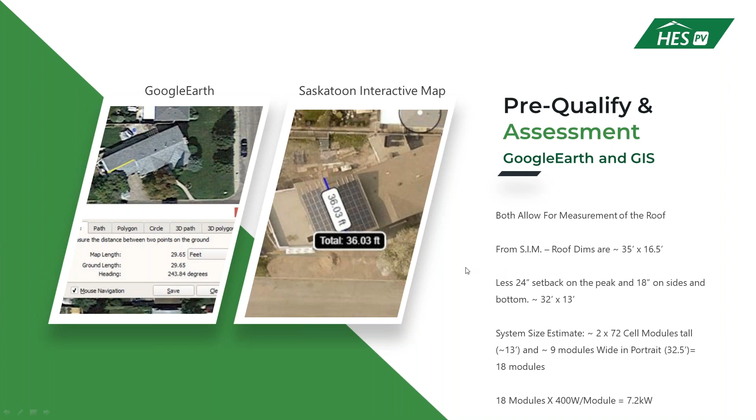Sometimes you want to present more. You want to get a better idea of what you could get, what you can provide your customer in terms of not only the system size, but as well the production. And there's a lot of great tools out there. A lot of them are pay to play, so you're going to be purchasing the software.

At the moment, we're currently using Aurora for some of our modeling, and I know a bunch of dealers out there are also using it. But there is PV Complete, Helioscope, and PV Assist, as well as many other ones. We're not selling any of their packages, just giving you ideas of what's around for you.

They all kind of act in a similar manner in that, by modeling the roof and adjusting the setbacks, you can populate based on your solar module size. They then take, of course, the local irradiance for that area, give a production estimate based off that irradiance, and give you a good model of what the roof can look like in terms of solar panels.

And a really nice perk of that is the ability to generate customized reports, something that your name can be on, delivered to site with that initial site visit. Cons, of course, it's pay to play. You've got to put the money up for it. Sometimes it's a monthly subscription, some are annual, and some are just outright purchase.

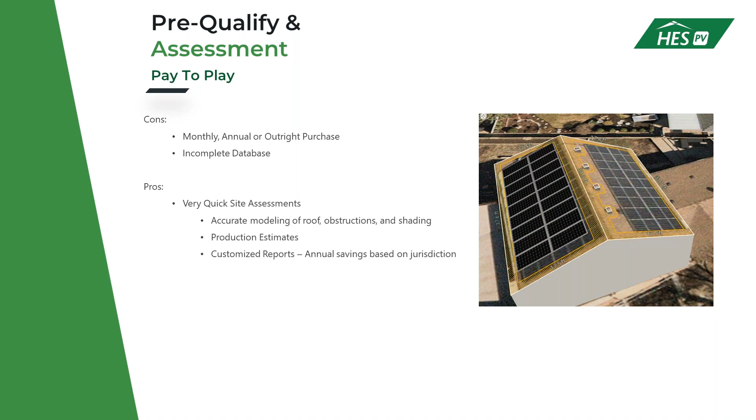The benefit of the pay-to-play program is this ability to not only put modules on a roof, but also to include inverters and optimizers, depending on what your system is going to be including. Calculating string lengths. I would always, of course, suggest caution whenever using something that's generating string lengths or making recommendations on how you're going to be wiring a system. Make sure that it's accurate. Always double check, of course. But assuming that this is accurate

and the size of the array is correct, it looks like this 7.2 kilowatt array, based on the roof slope and angle, you can see the irradiance on that roof is about 1,500 kilowatt hours per meter squared per year, or 1,500 sun hours. Gives you a good idea of what the system is going to produce,

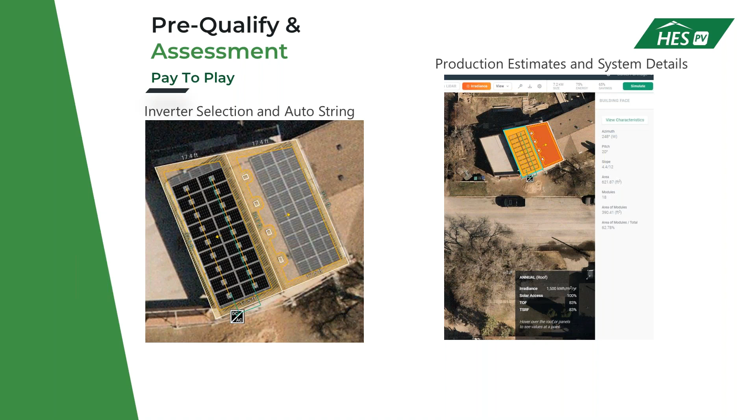assuming no losses. But because we've added the inverter using Aurora and we've added the strings, the auto-generated report comes out of this nice and easy. And again, this is potentially something you could take to your customer for that first site visit. 7.2 kilowatt array, producing somewhere around 9.1 megawatt hours per year, with 18 Hanwha modules, 18 P400 optimizers, and a 10 kilowatt inverter.

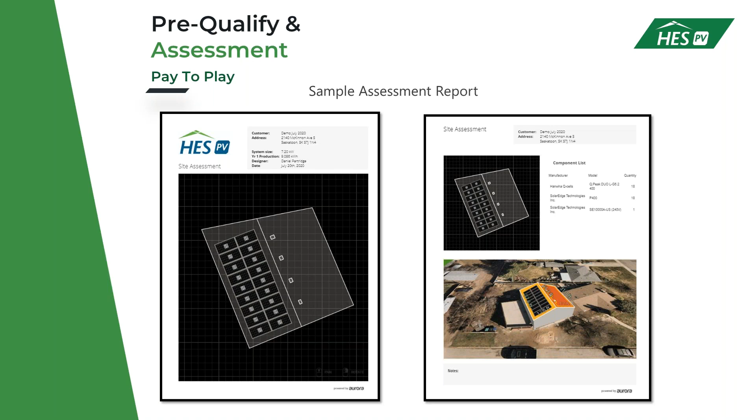Don't ever design a system this way unless you're planning on expanding the array in the future. This was me just quickly putting a sample together to give you an idea of what can be produced very quick and easy and taken to site.

Little known secret, not too long ago we published the fastrack.ca website. We actually put this out there really for homeowners to have a nice, easy first landing point when they're trying to find information about solar and putting solar on their properties, their houses.

And on that website, we have a link to allow customers to request a free solar assessment. We ask general information, location, of course, contact info, and also ideas on what the utility rates are and what their annual consumption is. We then take that information, produce a very simple one-page report for them with an estimate on how many modules based on just the area of the roof, not doing any significant losses, shading, or anything like that, but just getting an idea of approximately how many modules, what kind of output we'd expect from that solar array, and what kind of savings they can expect.

They get this nice single one-page report, as well as a request to see if they are interested in being put in touch with a local installer. That is a little bit of a pre-evaluation on our side to give on to you, our installers and customers.

But be advised, this is going on the local areas, so hopefully we're pre-evaluating customers in a specific region, and we're going to try to be fair to our installers in that area. So it doesn't necessarily mean that all of the leads are going to go to any one individual company. But good to know that it's in the back pocket, and expect that you're probably going to get some leads from this as more and more popularity grows with it.

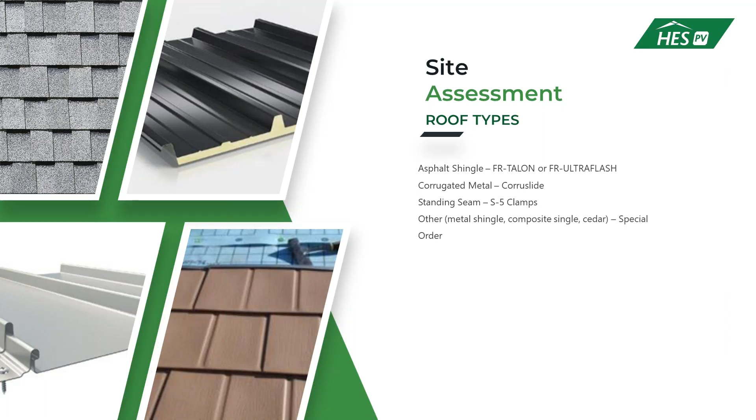Other things about the site assessment. We talked about this a little bit earlier. It is of course using the pre-assessment, Google Maps, Google Earth, whatever you wish, to get an idea of what the roof planes of the building look like. But this is a good time for you to get on the roof, actually get some measurements, and make sure that you can get the system you want.

Also important, of course, is understanding how you're going to get up on the roof. We've actually had a couple installs that were on the side of a cliff, and thank goodness for the site assessment, where we could actually plan ahead properly to get equipment up on the roof without having any special lifting equipment around.

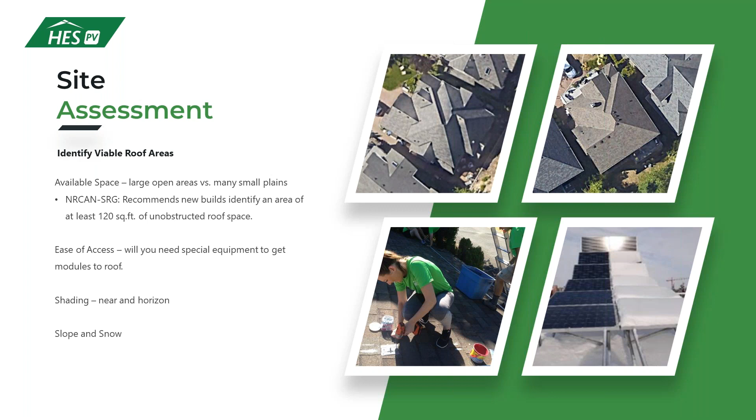Of course, the next part, when you're on site doing your assessment, one, get your sketchbook out. Start getting all your dimensions. I'm sure most of us have been to a site, thought we got all the information we needed, and then realized that we didn't mark out where a couple of our roof vents were, and that leads to concerns when it comes time for the solar install, whether we're going to have interference with our modules and/or racking. So can't hurt, measure everything, every obstruction that's up there, get a good idea not only of where it's located, but actually what the obstruction is.

The amount of times I've seen sketches that come in that indicate there's something on a roof, but don't indicate what that something is. I'd say almost on a weekly basis we get that kind of information, and it causes delays with speccing projects and getting your systems out to you.

I can't stress enough how important it is to take pictures of everything. Pictures of the roof, pictures of the access, pictures of the horizon. This place just happens to have a phenomenal view off the top of the roof there. And this is just a little north of Victoria here. And of course, confirming dimensions, see how accurate you were with your pre-assessment. Get those tightened up, get a more accurate idea of what your array is going to be.

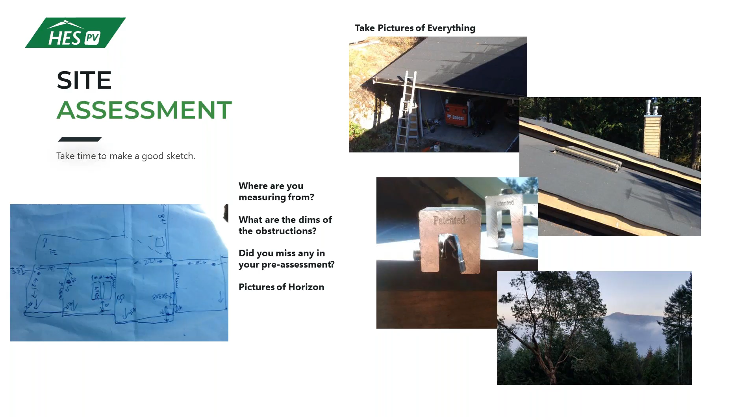With all that information, once you've got the roof planes measured out, you've got the obstructions located, your slope, understanding how much room you've got available, now's the time that you can go out. This is easy to do with a pen and paper. Looks a little bit nicer, I feel, if you can do it in some type of CAD program. Google SketchUp is free. It's an easy one to learn. It's definitely worth looking into. Otherwise, definitely with Aurora and PVsyst, and I'm sure with PV Complete, you can actually put in your individual dimensions and populate the roof array accordingly.

Once you've got an idea of what you're going to get in terms of modules on the roof, in terms of what your rows of modules are, definitely visit the Fast-Rack component generator on the hespv.ca website. The link's on the right-hand side for you to write down, and you'll find it online when this gets posted later on. You can put in the details of your modules, how many modules, what rows you're getting, and you get a nice clean list of components that you'll need to send on to your sales rep in order to order your product. Makes quoting a heck of a lot easier, saves you a bunch of time and potentially missed components.

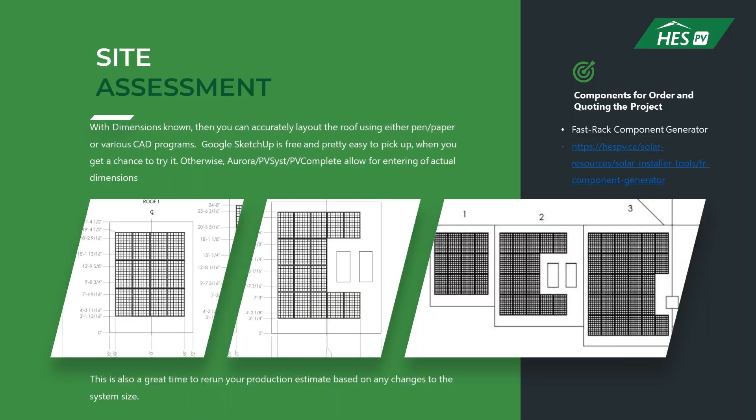Of course, when we change the size of the array, when we've confirmed that we've got our module count accurate, this is a great time to again rerun your production estimate to see if there's any changes based on changes of the system size. I mentioned loads, environmental loads, and so wind loads, of course.

And of course, snow loads. More important with the flat roofs again, in terms of solar arrays causing a little bit of damming, causing some drifting to occur, and potentially increasing the snow load on the roof of the building. Sloped roofs, generally not a problem because the makeup of the modules, the glass surface, generally makes them better at shedding snow anyways than the shingle roofs that they're being installed upon.

Glass and metal, of course, both being quite smooth, so you are getting rid of a lot of snow on both with a solar array on a metal roof or just a metal roof by itself. So again, not a big change to the snow loads on sloped roofs.

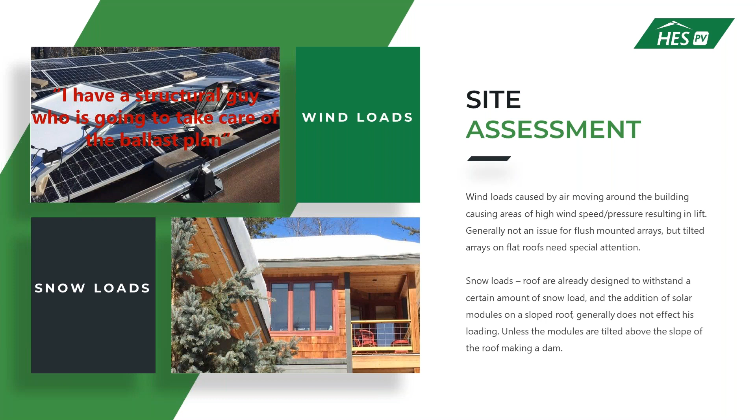I'm going to just touch briefly on the image in the top left. This was an install where the customer decided that they wanted to do their own ballast plan, and unfortunately it did not work, did not get warranted, and was potentially hazardous. Thankfully, I believe they got it resolved, but we do offer ballast plans, engineering sealed documents giving accurate ballast locations. I strongly recommend you take advantage of those for your ballast systems.

Want to talk a little bit more about wind loads, how we actually get what the actual wind load is. I'm not going to go into a long discussion on the National Building Code. It reads just as well as the Canadian Electrical Code, which is dry on both counts. But determining wind loads is not just as easy as looking it up in a book and figuring out, oh, my wind load for this site is X. It takes in a lot more information than that, in addition to the physical location of the install.

But it also does have a scaling factor based on whether the building's an unoccupied building, like a shed, your house, which is generally a small population building, a larger population building like an apartment building or business or office building, and then post-disaster buildings which are expected to be at least standing and partially functional after a large environmental issue, such as an earthquake, schools, fire departments, that kind of thing. And so there's a scaling factor with regards to that.

Exposure, whether you're in a rural area or an urban area or some kind of mix between buildings and open land around. Those all affect how the wind acts on buildings. Just like a building, a hill or escarpment can also cause wind to accelerate, causing greater uplift on buildings located on the top of hills or close to escarpments.

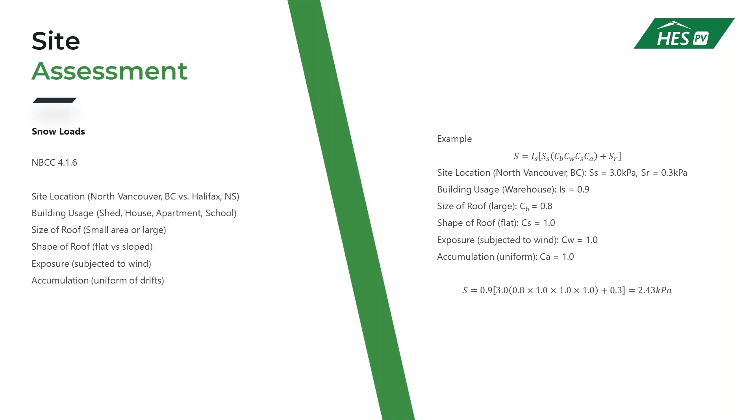The shape of the roof, again, flat, nice and easy. Exposure to wind, assuming it's just a generic building, doesn't have any obstructions on it, doesn't have any parapets, scaling factor of 1, and with no parapets, you don't get any accumulation. So where we started out looking at potentially a 3.3 kilopascal snow load, it actually drops down to 2.43 kilopascals. That's going to be important when we start looking at modules and compatibility with snow loads and mounting points. That's come up with a couple of different projects over the last couple of years. And so this is just a little bit of background as to how we get the values we use.

On with the site assessments, very briefly going to touch on live loads versus dead loads. Dead loads, nice and simple, means stuff that stays on the roof. If it's a permanent attachment, if it's an HVAC unit, the solar array is, by nature, a dead load. It stays up there. And then, of course, the live loads are things that are variable based on the occupancy of the roof, temporary things, such as the installation team.

For those who haven't met me yet, I am that large guy up in the top right of your screen right now, with my fall arrest gear on, and demonstrating our fast rack tape, which we're going to talk about very briefly in a moment.

When we look at live loads on a roof, the building code requires a minimum value, or else it is usually designed to the roof snow load, because in Canada, our snow loads are significantly higher than the minimum expectation from the building code.

Side note, for those people installing on shingle roofs, most shingle roofs are designed with an extra 5 pounds per square foot available capacity, which is approximately the amount of weight added by installing a second layer of shingles over the first. Because our PV installs on flush roofs are generally under 4 PSF, this is a great point that we like to make with the building departments, to let them know that if there's only one layer of shingles on the roof, it's generally safe to assume that the roof has the capacity to install a PV array without any requirement for additional building permits or engineering review.

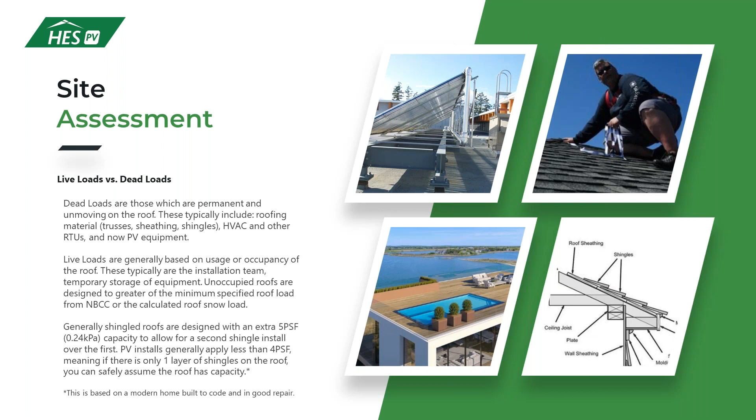Big note, this is assuming the building is built to current code and is in good repair. If it's an old rackety shed, you might be in trouble.

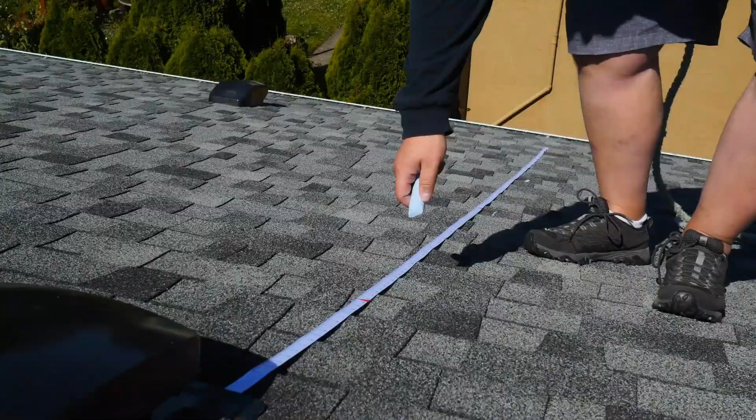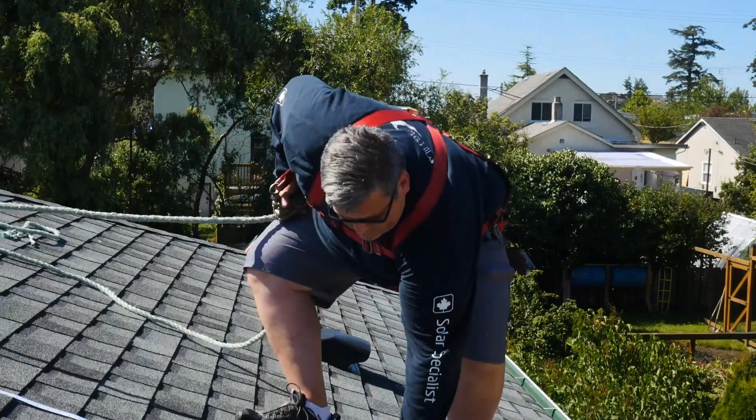The fast rack tape is nice soft tape, easy to crumple up, throw in your toolkit while you're traveling to site, secure it up at the top of the roof, give it a bit better of a throw than that. What we've got is these red marks that you'll see in the bottom left of the screen on the tape, which measure out where you're going to want your rails to be sitting for 2 rows of rails. So marking out the course of shingles for the top rail of the top row, bottom rail of the top row of modules, and so on as we go down to the second. Nice and easy, makes the install a little quicker, just marking out which row of shingles you need. Saves time and saves people trying to calculate where they want those to be.

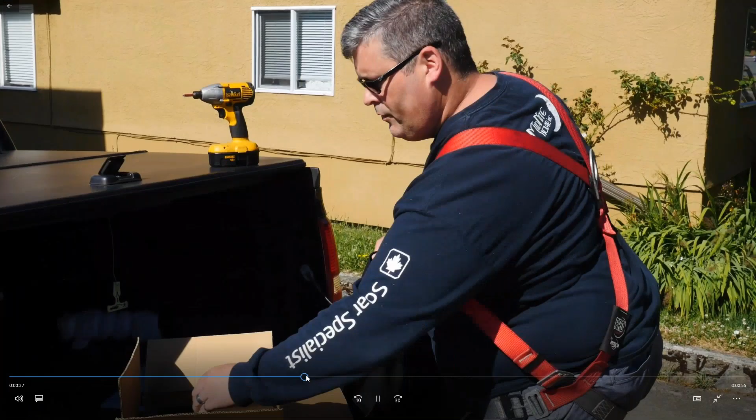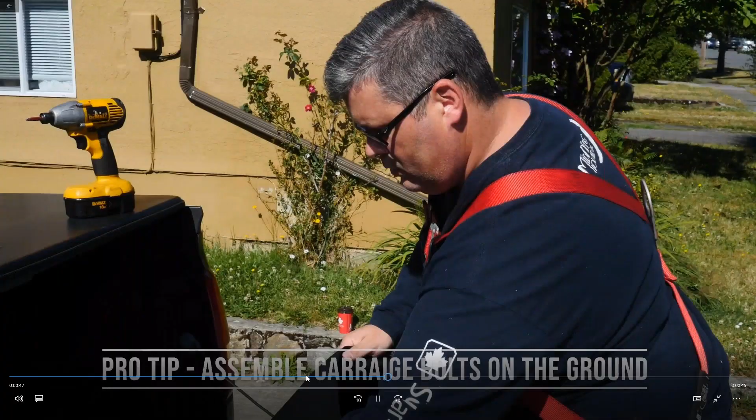Into this bag, we actually managed to get a full box of the Fast Rack talons, 25 talons, 25 flashings, the screws necessary for it, and of course the impact needed for the installation. Convenient. We did design it so the strap wraps all the way around, so it does have the capacity to hold the modules. Nice, goes over the shoulder, and good for getting up on the roof without fighting too much with your gear. End it at that point and continue on.

The Fast Rack bag, great product. Saved a ton of time on a couple of our test installs, and the people who've used it so far have been very happy with its function.

Now the big ones, which everybody really does care about: we have a product out, the Fast Rack screw, or FR screw, in your price lists. It is a box with 250 1.5-inch number 10 metal screws. 250 because that is the quantity you're going to want to use for a box of the Fast Rack talons. Order a box of the talons, order a box of the screws, you're ready to go. 1.5 inches, we settled on that length as it is a good length for penetrating a row of shingles and getting into the sheathing, even if there happens to be some insulation in between.

Then we've had a lot of questions about metal screws. Why do we spec metal screws? The reason is wood screws usually have an unthreaded shank up near the head, which is exactly where we want to be biting into the sheathing with our Fast Rack talon. Despite being called a metal screw, it is designed to be screwed into wood. The metal portion just means it's also designed to be able to punch through sheet metal. So if you had a metal roof, you could actually get through it using these screws. Don't recommend using the Fast Rack talon on a metal roof, but that's the reason for the screw.